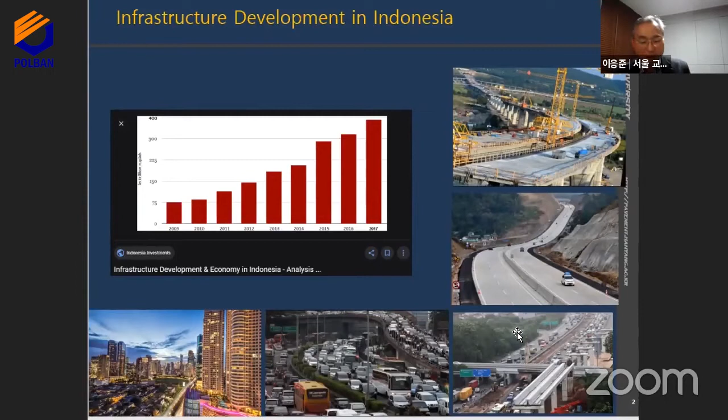Thank you for inviting me to this wonderful web seminar. Today I'm going to talk about what to prepare for the big challenge in Indonesia in terms of pavement engineering. As you know, Indonesia is one of the fast-growing countries in the world, so you have lots of infrastructure development all over the country. This is an excellent chance for civil engineers, but as there is much development going on, many relevant issues and problems will arise.

So let's see some of the issues that may arise in pavement areas of Indonesia. These include overloading and flooding, resulting in distresses and traffic congestion due to maintenance or rehabilitation work. There could be so many issues that are not easy to solve in the right time.

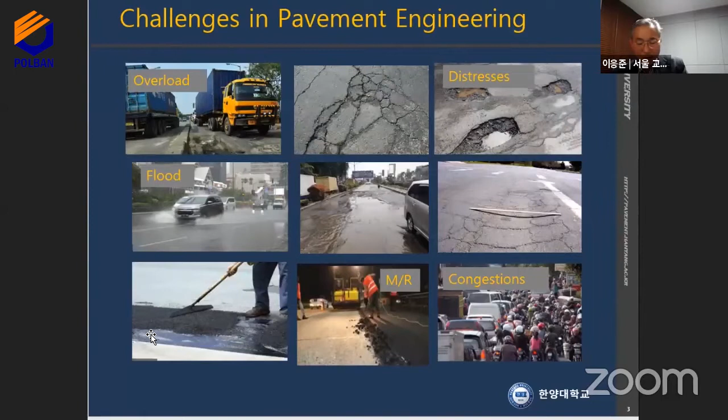In Korea, we have a very similar situation from about 20 years ago, so I'm going to talk about my advice from Korean experience. Let's go to the next slide. I'm going to talk about the factors affecting pavement performance and some of the special features of Indonesian cases, and two pieces of advice on what we have to prepare and what you better prepare in advance from the Korean experience.

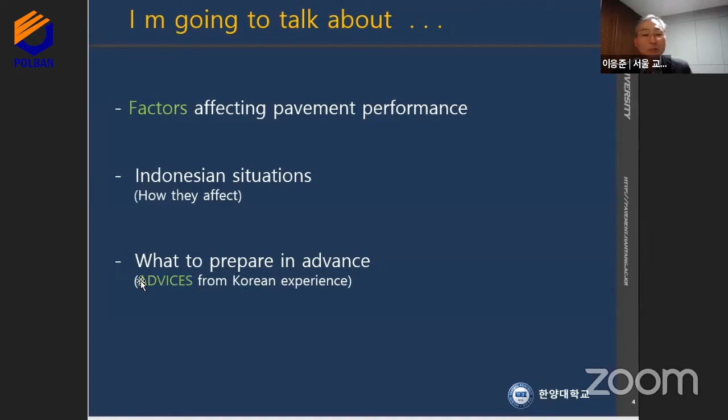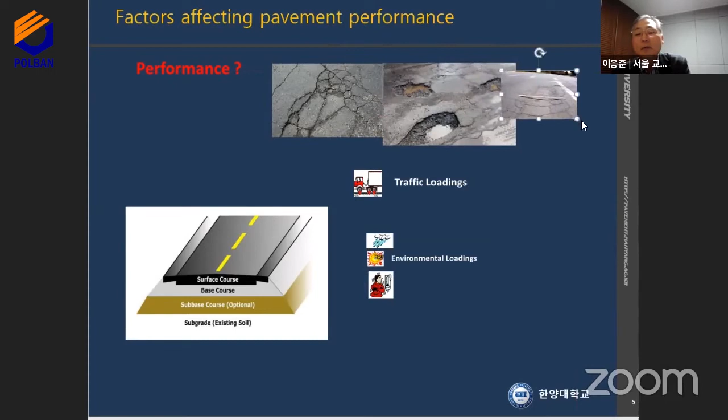So let me begin with the factors affecting pavement performance. When I say performance, it's like distresses: cracking, potholes, ruttings and cracks. Let's see this pavement structure.

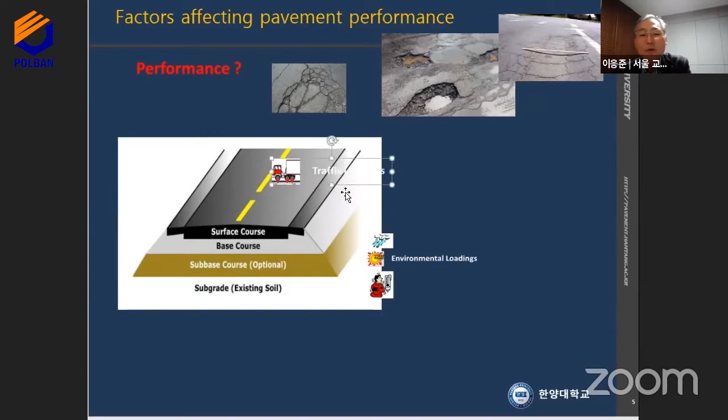This is the pavement structure, and there will be traffic loadings. But not only traffic loadings—there will also be environmental loadings like rain, flood, hot weather, and in some countries like Korea, cold temperatures.

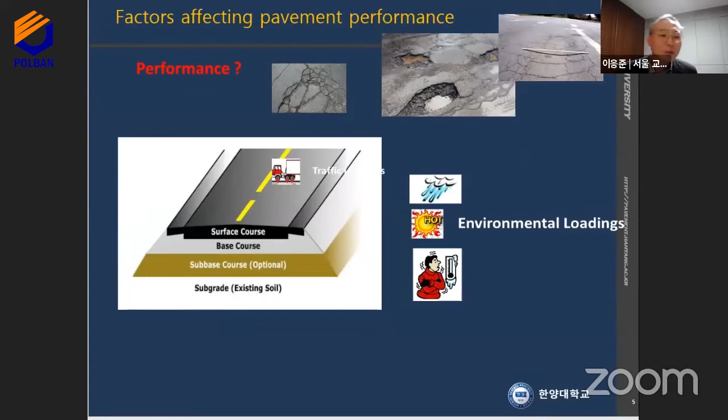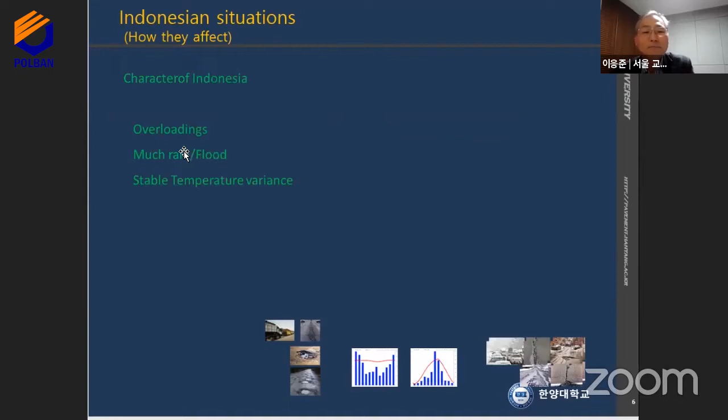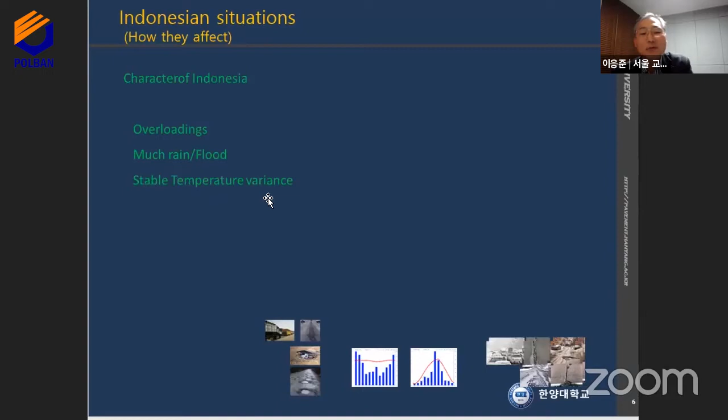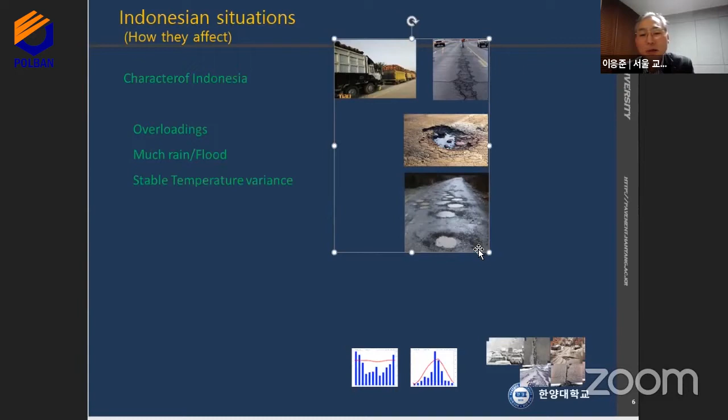The Indonesian case is like this. I got this information from Retno. You have some overloadings and much rain and flood, but I see some stable temperature variance. Due to the overloadings, you have cracks and potholes, that sort of distress, but you have some beneficial environment.

This is the rainfall and temperature data of Indonesia. The blue column shows rainfall, so you have much rainfall. This is the Korean case on the right side. Do you see my cursor? Yes, we can see it. Good.

Again, the blue ones show rainfall, and the red line shows temperatures every month. On the right side is the Korean case—rainfall is focused on the summer season only, but the temperature variance is quite big. In Indonesia, you have only summer, like the Korean summer case, but with more rainfall. Much rainfall is not good for pavement, but stable temperature variance is very beneficial for pavement.

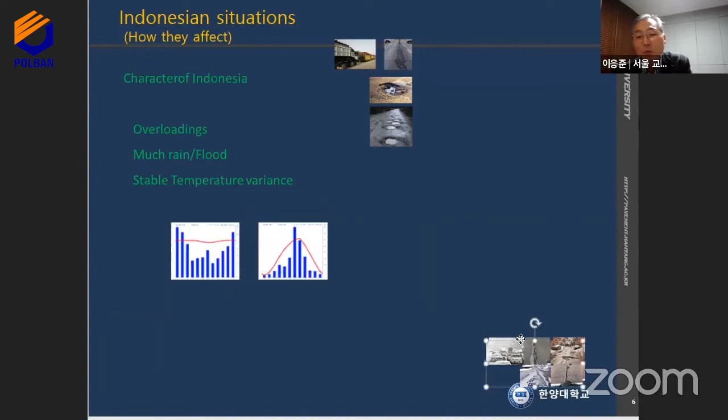In Korea, during the winter season it's very cold, so we experience different distresses. We have so much snow, and this kind of spalling and potholes—different types of potholes and cracks, or D-cracks.

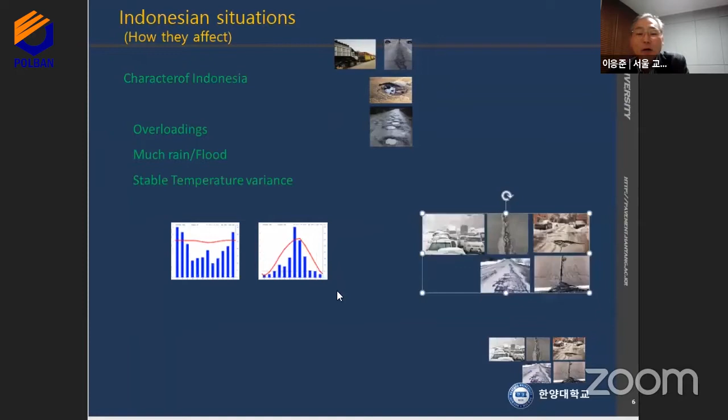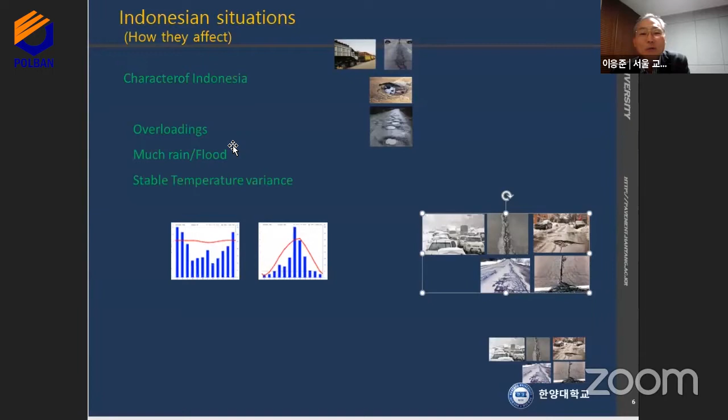So in pavement cases, you are in good condition actually, even though you have rain problems, and overloading problems are everywhere. You have to enforce regulations—by enforcement, you can reduce overloading, but it's not easy to eliminate it all.

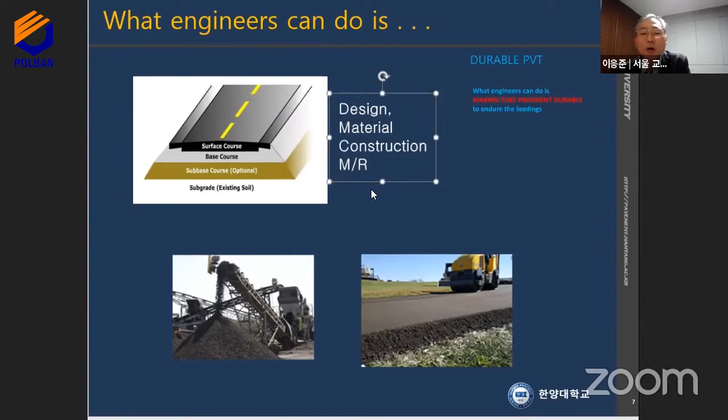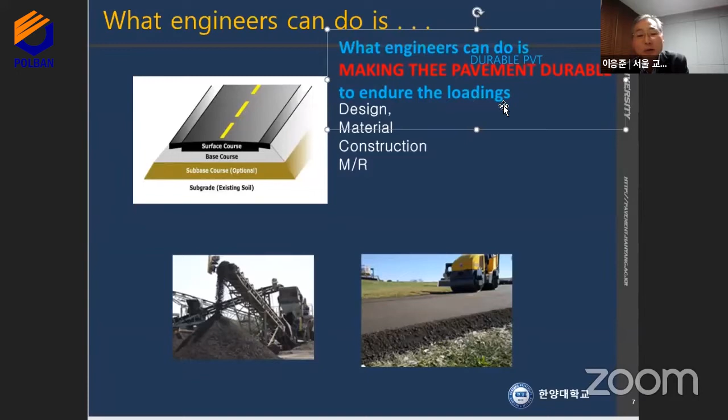Now, what can we engineers do with this situation? In case of design, material, construction, maintenance, and rehabilitation—those are the options we engineers can take. So in order to get a durable pavement, what engineers can do is make the pavement durable to endure the loadings—not only traffic loadings, but also environmental loadings like rain. So we think of materials, construction, design, maintenance, and rehabilitation.

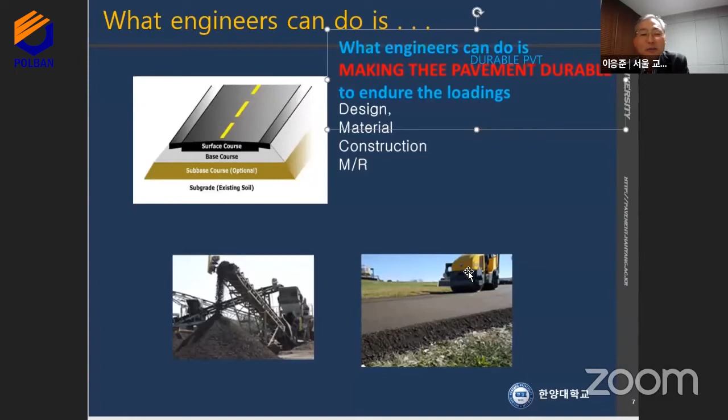Now, what we have to prepare in advance. The keyword is evaluation system. There could be various new materials, designs and constructions because you are very fast growing countries. If you do not have a proper evaluation system, you will experience a lot of trial and error in selecting new materials, new designs, new construction, and new maintenance and rehabilitation.

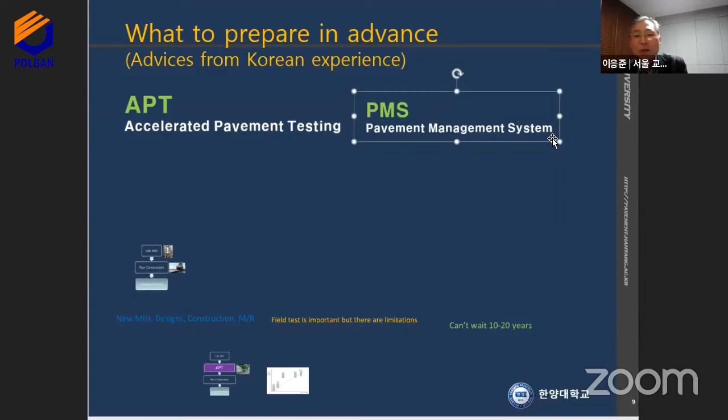So I recommend you to implement the following two systems: accelerated pavement testing and pavement management system. Let me begin with accelerated pavement testing.

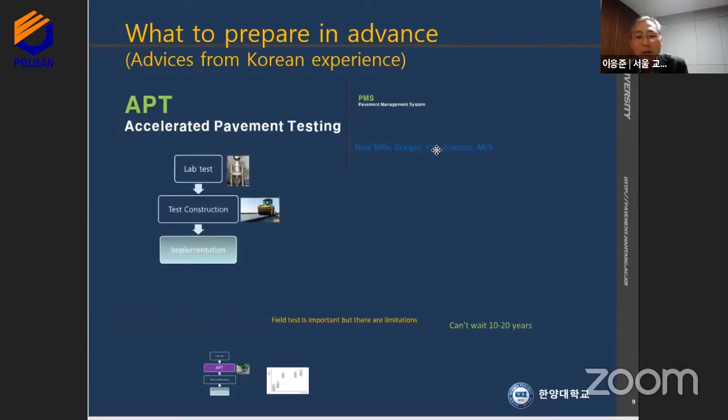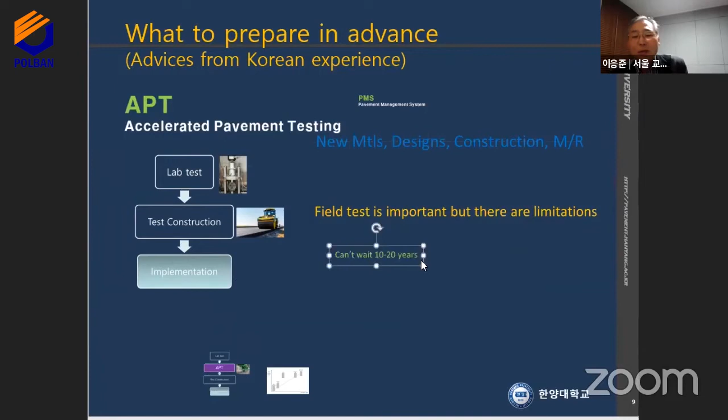In many cases, for selecting new material, design, and construction practices, the normal procedure involves some lab tests and test construction, and then if it is successful, we just implement the design or material. But this is not enough for implementing new designs and materials. Field testing is important, but it has limitations. You cannot wait 10 to 20 years to see the performance results of the construction.

So my recommendation is—and this is not only my recommendation—in many advanced countries, they implement accelerated pavement testing.

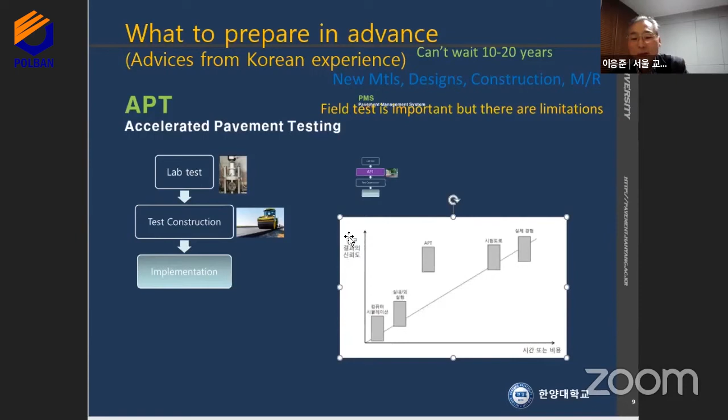This accelerated pavement testing involves the reliability of the test versus the cost. This is cost or money, and this is the reliability of the result. This is the lab test, and this is the field test. If the cost is higher, the reliability is higher too. But APT is right here—with much less cost, it has high reliability of the result.

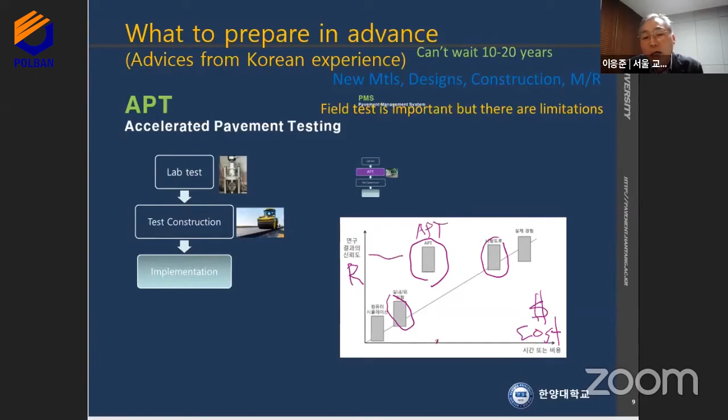Let me show you some accelerated pavement testing. This is HAPT, which our university has one. This is the bogie that moves like this.

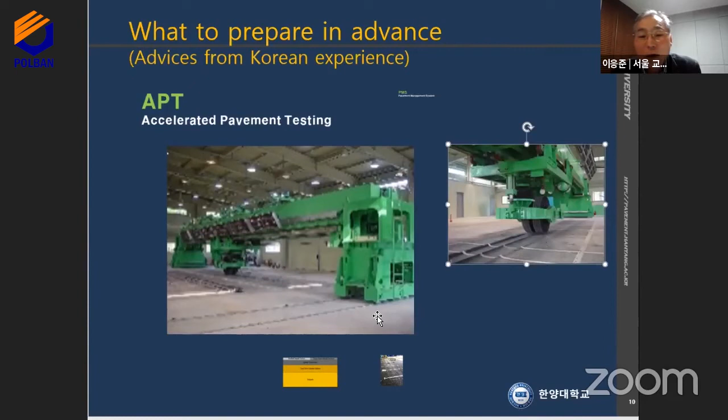In the test bed, we constructed it like this: subgrade, subbase, and base. You want to examine the new pavement design or new materials, and this is a conventional material, then loading happens here and here at the same time.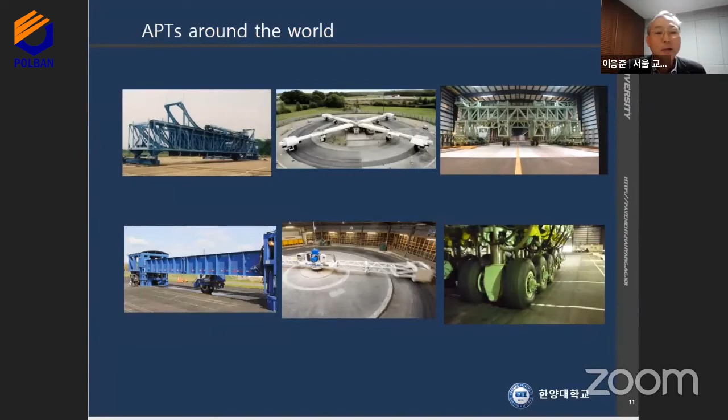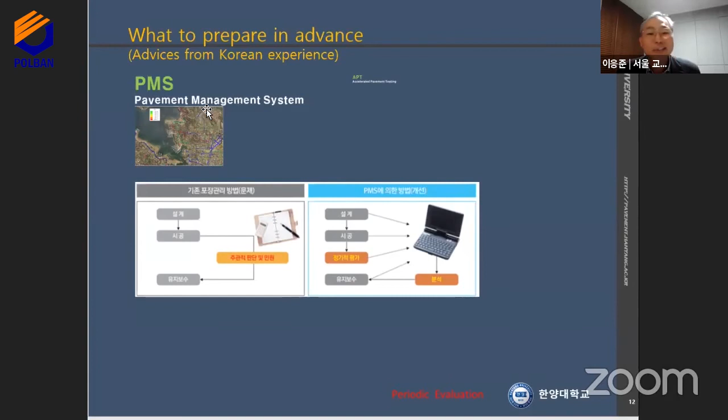The second advice is to implement a pavement management system. As you can see here, there is a vast network of roadways. Pavement deteriorates every day, and every section of roadway requires maintenance, which costs budget or money.

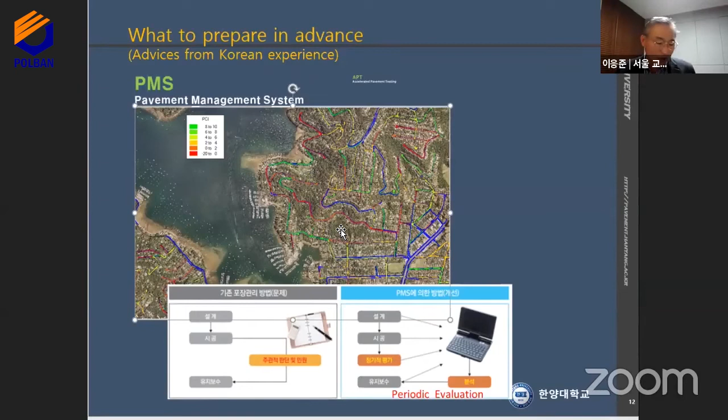In many cases, maintenance or rehabilitation is decided by subjective opinion. Without the pavement management system, the decision process—design, construction, and maintenance—is decided by the subjective decision of a decision maker.

But with PMS, there is periodic evaluation: pavement evaluation, pavement survey, which goes into the database and is analyzed, and then from the result of analysis, the maintenance is decided.

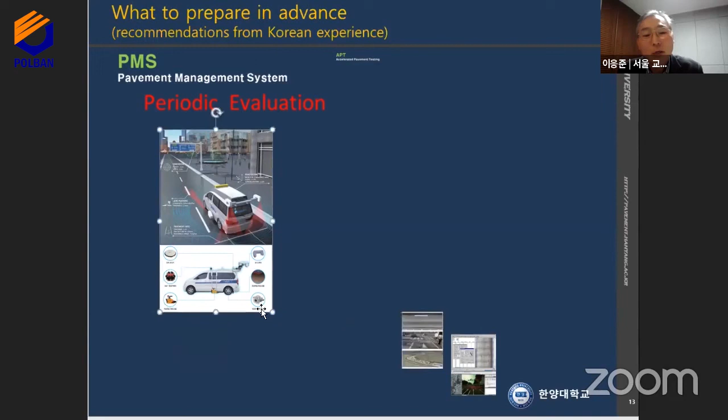The key is the periodic evaluation. The key point of PMS is evaluation, pavement evaluation. This is one that we use in Korea—a surveying vehicle, and it has many components like this.

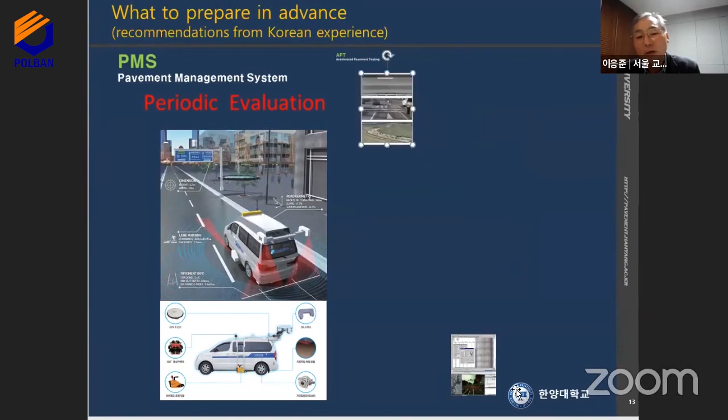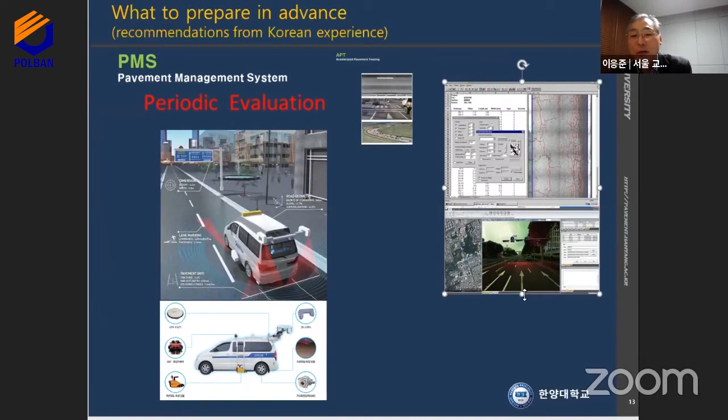They take pictures of the surface, scan the roughness, and so on. It shows us this kind of cracking map, rutting information, and roughness information. It goes to the computer, and we can analyze it and see the outside without going out to the field—right in the office.

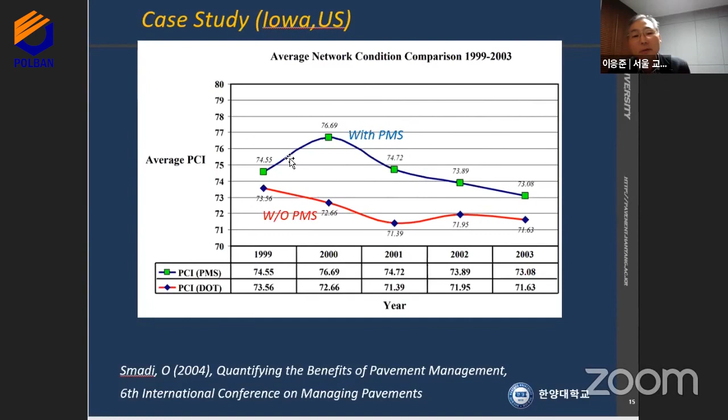This is with PMS, and this is without PMS. With PMS, the pavement condition can be maintained at a higher level. This is what this case study shows.

In summary, in Indonesia, the evaluation system is very important. Implementing an accelerated pavement testing system and a pavement management system is recommended. That's it for now.